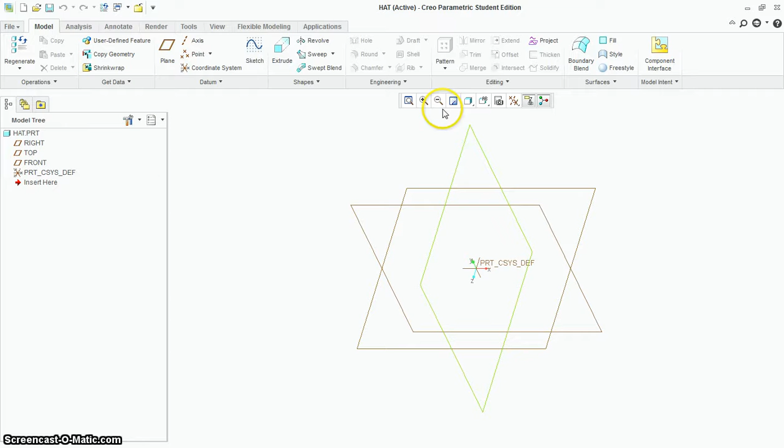Let's make this capital. And it's a part. And you're going to say, go ahead and revolve. You should be able to get this done in one period. And click on the front plane, sketch view, and make your circle diameter 27. So this should be pretty easy up to this point.

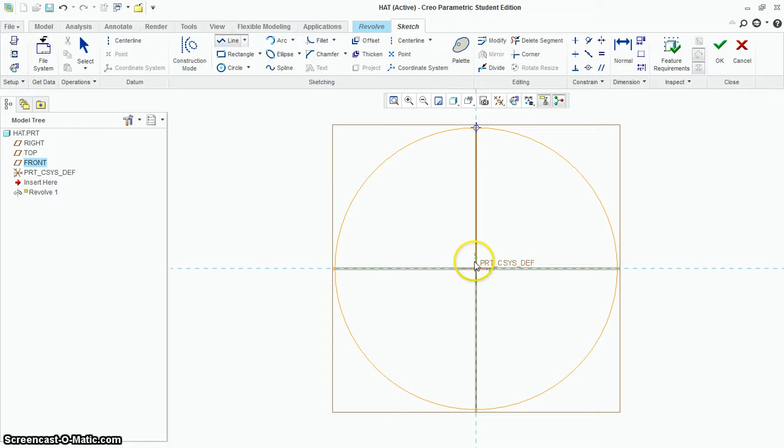Now, half of 27, as you know, is 13.5, not 11. So don't bring this line all the way down to the middle, or your hat's going to be too tall. So bring it short of the center point, and then cut straight over. And then we're going to dimension that to the actual height of the hat, which is 11. There you go. So right there's your hat.

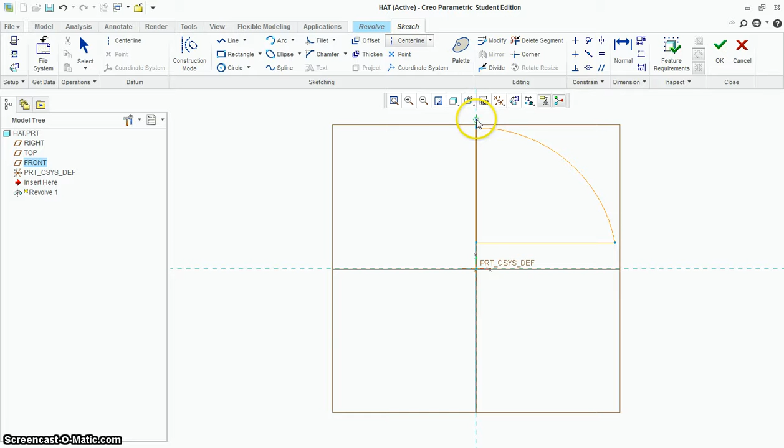This all gets trimmed out of there. So go to delete segment, take this out, take this out, take this out, take that little piece out. Don't forget your center line because you're doing a revolve. So that's going to go vertically right down the middle here and accept it. And there's your dome. Accept that. Okay, so that's the beginning of it.

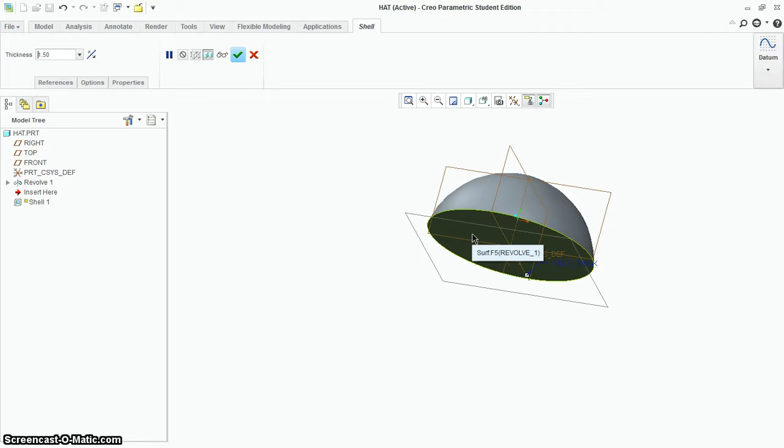Now we're going to shell it. So I said 1.5 millimeter shell, so we go to the shell. We used this on the bottle, we're going to use it again. So shell 1.5, and then you're going to click on which part of it's going to be open to the shell, right here. And if we did that correctly, you should have 27 on the outside, minus 1.5, minus 1.5 should be 24 left inside, perfect fit on the head, and accept it.

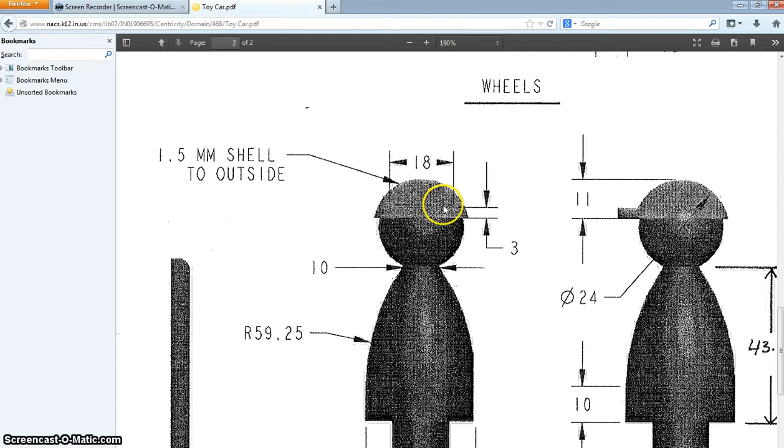There you go. Go back to the drawing and you look, and there's a bill on here. Now it's a little fuzzy in the picture here, but the bill is basically a rectangle that's centered on the hat. The bill is 18 wide and 3 tall. Now you may think, okay, that's easy. We'll just go ahead and take one of these planes and draw the bill on there. Well, the problem with that is that you're always going to have part of that bill left up inside the hat. So we're actually going to learn a new tool today, and that is the datum plane tool.

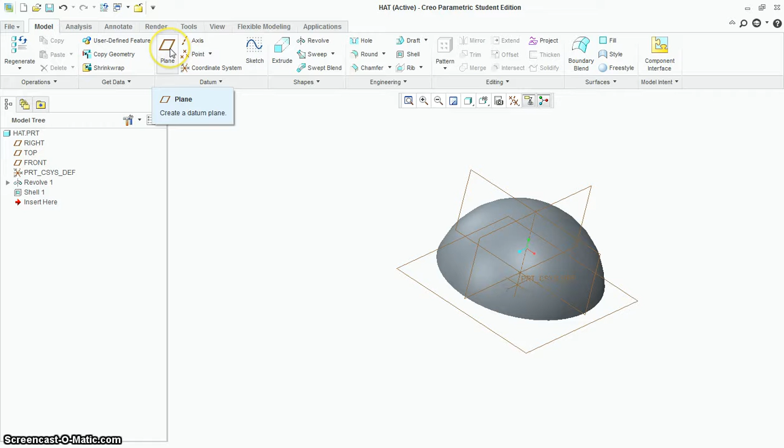And this is one of those things that kind of unlocks a lot of possibilities for being very creative on future drawings. We can click datum plane tool, and then we're going to click something flat on the screen or another plane, and it'll make a plane parallel to the plane I click on. So once I click that, then I can grab this little grip right here and start pulling this extra datum plane out. So I'm making a plane parallel to the plane I clicked on.

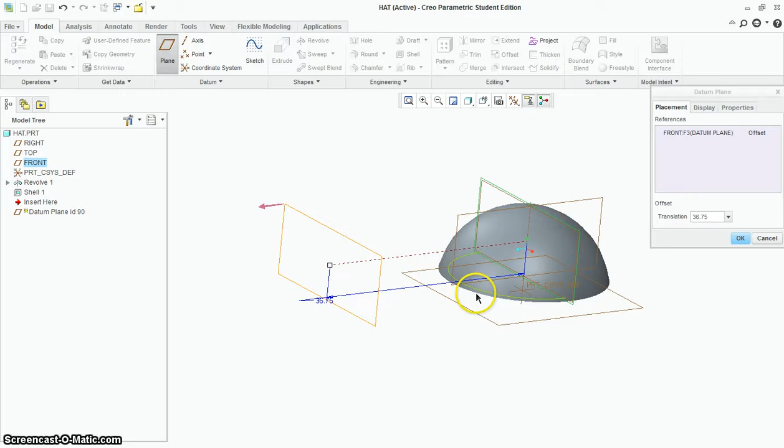Now you can pull this plane out however far you want. I don't care how long the bill of the hat is, so that's an option that you can choose. And accept this. And we're going to use this plane to draw and extrude on. So if you want, you can click off of there and say extrude onto this plane. Click sketch view. And what you're looking at is you're actually drawing on that datum plane we created, but you're looking straight at the hat.

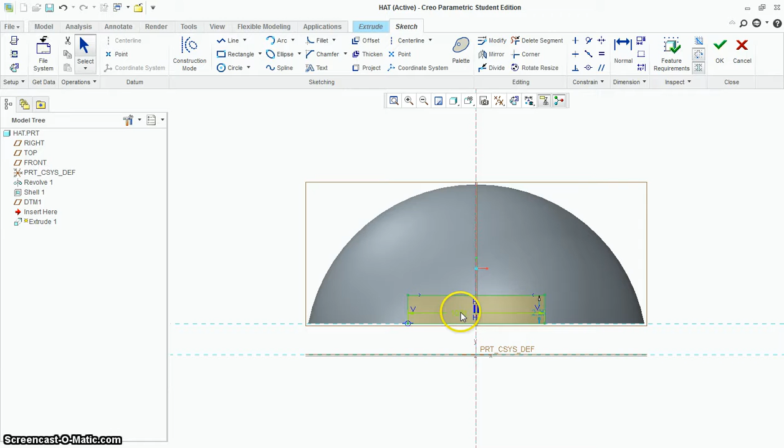Now you don't know where the bottom edge is, so you have to right click, set references, and find the bottom edge. If you can't find that center plane, you could do that as well, and then close. Now just like we did with the cube toy, we're going to go ahead and put a center line down the middle. And the advantage of having a center line when you draw rectangles is that it snaps symmetrically across the center line. So as I do this, it makes it the same on the left as it is on the right. So middle click, and then dimension this 18 by 3, and we're almost done.

Now let's look at where we drew that. Notice that it's out here on the datum plane. I do not have the bill drawn on a plane that's inside the hat. So this was with this datum plane tool that we had in model. So there's this plane tool here. So we're going to go ahead and accept this sketch now.

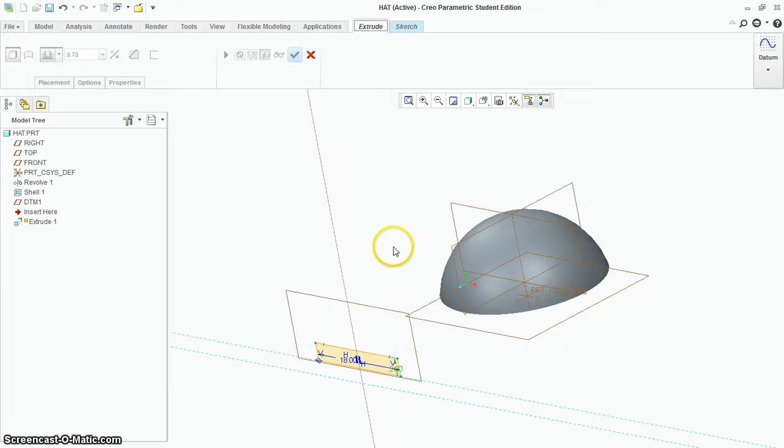Let's see here, what do I do? I lost my tool. Oh, there's my green check mark. Okay, so green check mark, accept this. It is going the wrong direction. We want it to come back towards the hat.

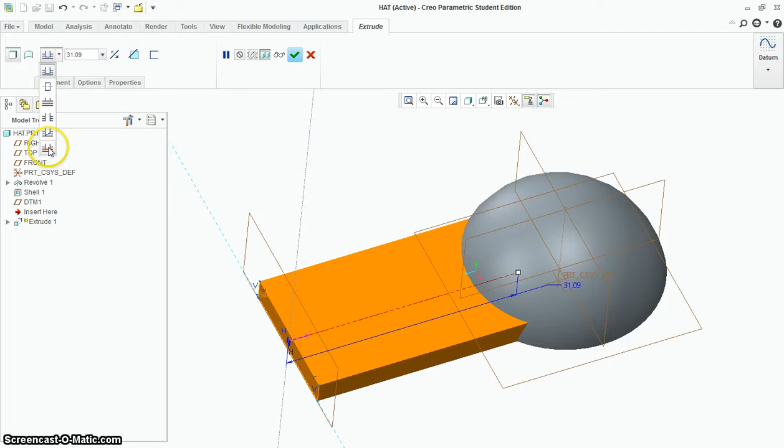And you know, if you manually pull it back in here, it looks good from here. But look underneath. You got the bill extruded all the way into the part where the person's head would be. So what we're going to do is use a tool we've used once before on the grips of the cap, and that is extrude to selected point, curve, or planar surface. So we're going to select this pull down menu, get the one with the red on it, click on the front of the cap, and accept it, and you can see that it brings it right back to there.

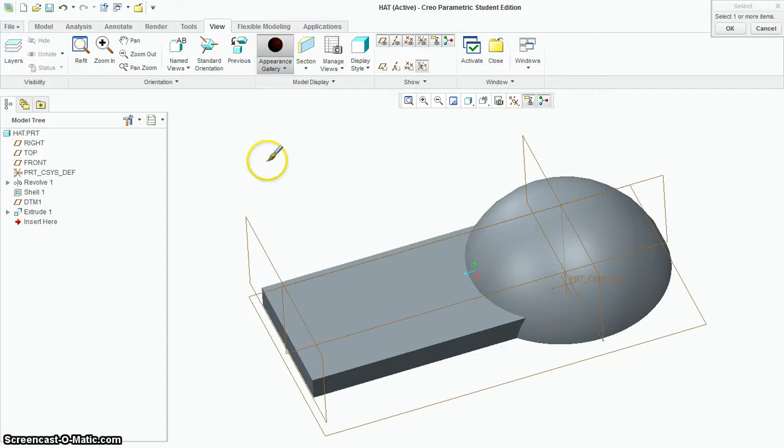Now if you want to round it or do anything to it or add extra stuff on it, put letters on the top, whatever you want to do, that's totally up to you. You can do that. I'll go ahead and just color it real quick so we have a little bit of something that looks more interesting here. There you go. Alright, so we got, I think that's leather, and save it. And that's it.